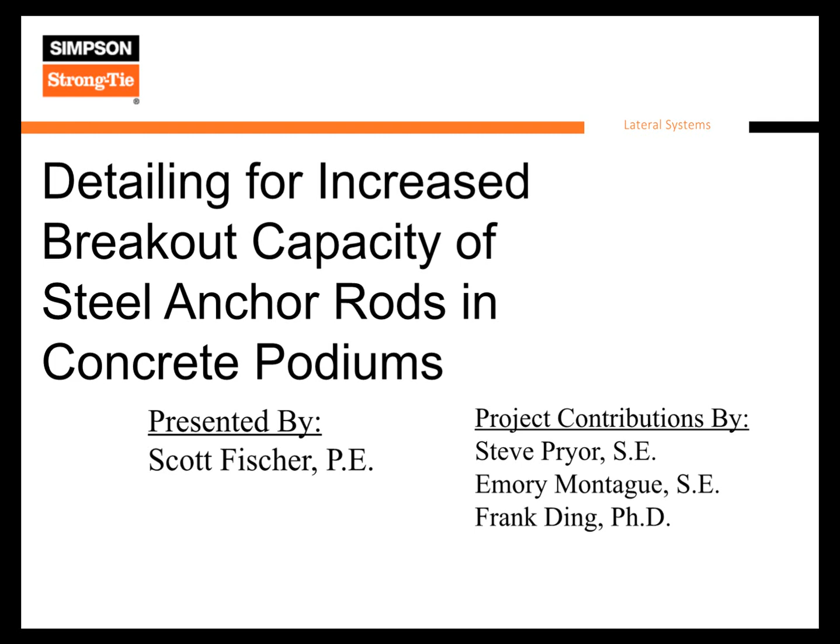I'd also like to recognize Frank Ding, who was heavily involved in our nonlinear numerical analysis that we used as a tool to better understand some of the testing that we performed over the duration of this project. So now I'm going to go through a bit of the history over the last several years that led to the findings we're going to be talking about today.

To understand how we got to where we are today, we have to go back a number of years. Our testing and study started out as a partnership with the Structural Engineers Association of California, as did an earlier project that covered sill bolt anchorage. As many of you know, the 2000 IBC introduced the current method of calculating concrete breakout, known as the CCD, or concrete capacity design. That was incorporated into the 2007 California Building Code and also adopted into the 2006 IBC.

From there, people started seeing the reality of the impact these provisions had, specifically as related to sill bolts and light frame construction. The design capacities were so low based on the code equations that the number of bolts required for a standard shear wall began to feel very excessive. So we were approached by SEAOC and began testing sill bolts in concrete to reestablish the values. This led to the code changes we have today.

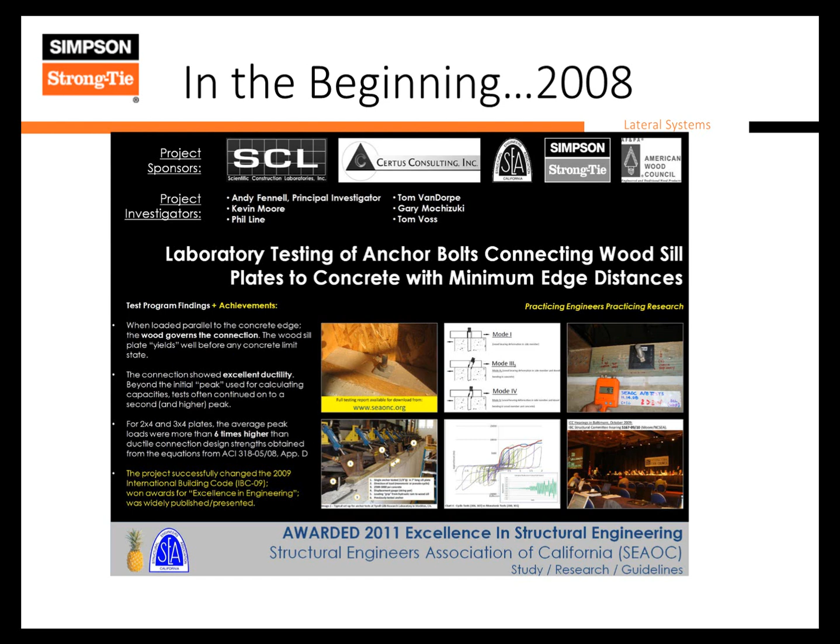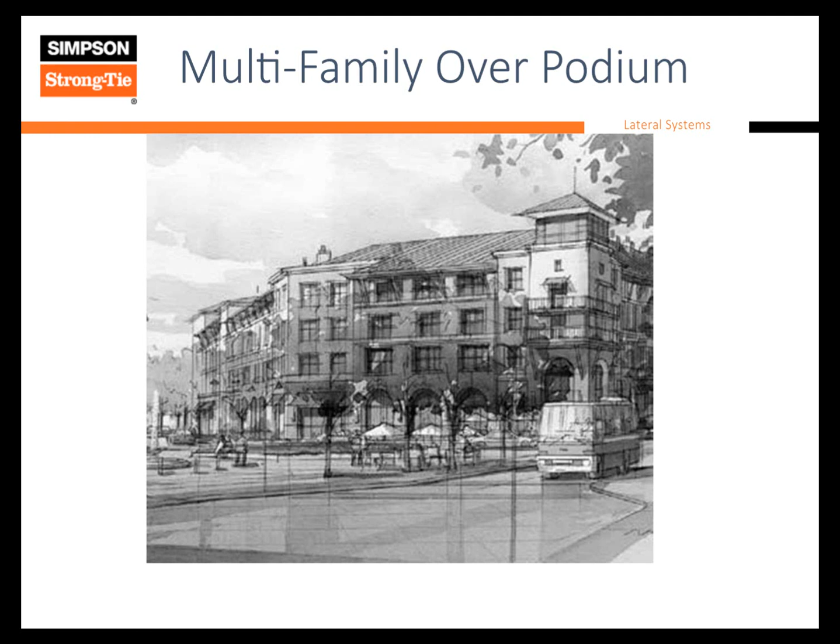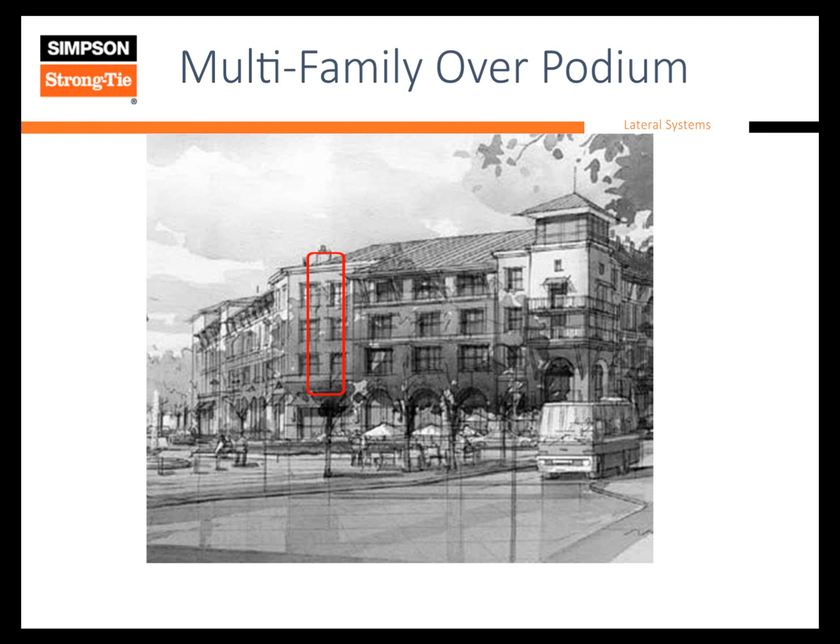Moving forward into 2011, 2012, we started to look at a different problem associated with structures built for densely populated urban areas. These structures typically have 3 to 5 stories of wood light frame construction over relatively thin, elevated concrete podium slabs. They utilize wood shear walls that impart pretty high overturning loads on these thin slabs. We saw a lot of typical details associated with full building height rod systems, for example this elevation of our Simpson Strong-Tie ATS system.

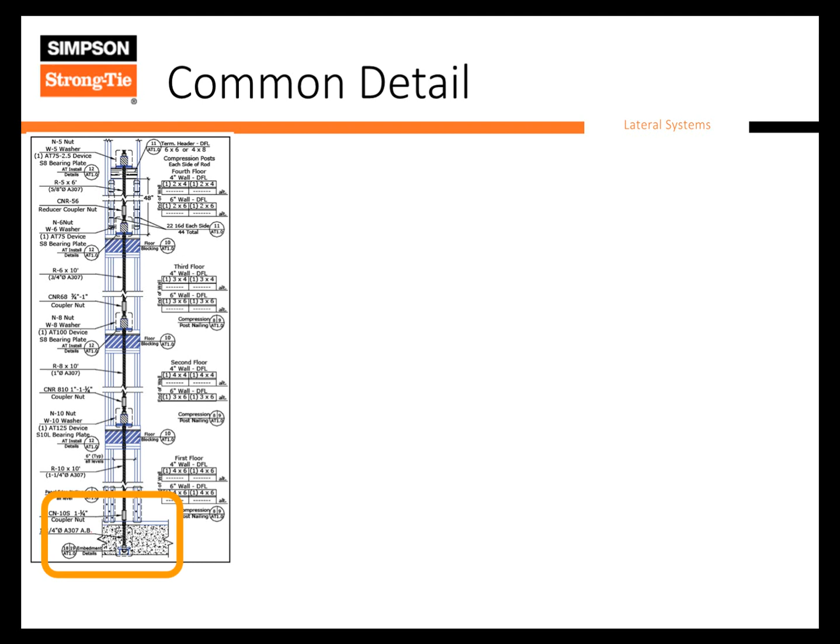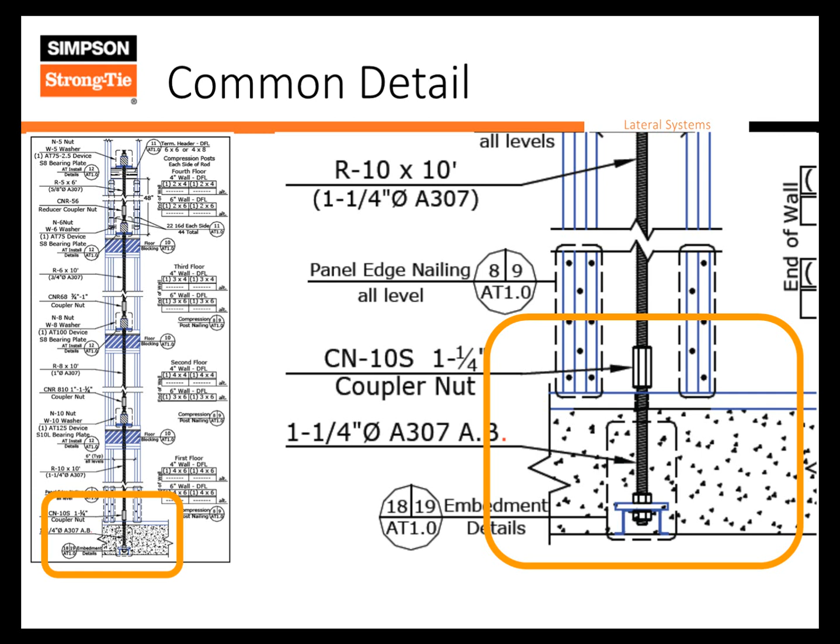The rods at their base had an anchorage embedded in the concrete, very similar to what we see here, with a termination at the cast-in-place anchor bolt. It wasn't unusual to have the anchor cast in the concrete instead of below the slab. By casting the anchor into the concrete, it's protected against corrosion, fire, vandalism, and other external effects, and we typically like to see a cast-in-place solution.